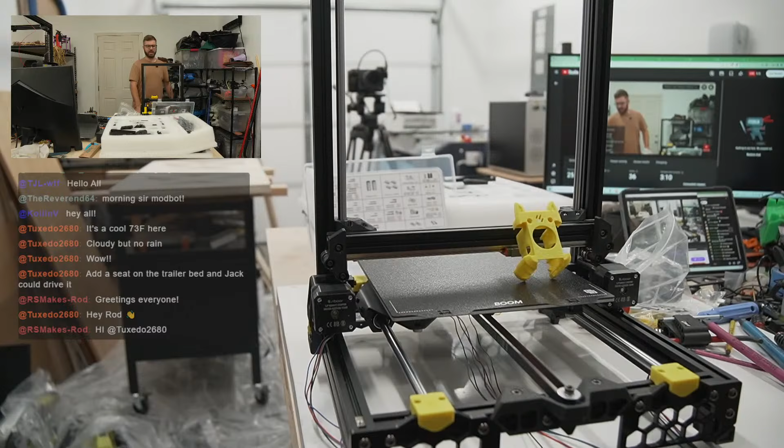Yeah, hey Rod. So today we are diving back into the, I didn't take an allergy pill last night, dang it, diving back into the Siboor boom. We have made a lot of good progress. Basically the base of it's all done. We got most of basically the tower itself is done.

This still needs to get belted. Only the y-axis is belted right now, which I'm not sure this tension feels, we'll see. Only the y-axis, hey Stuart, is belted. So we still need to belt this, and then today is largely toolhead stuff, so we're going to see how far we can get. I'd love to do the full toolhead today, but it really just depends on how cooperative everything is today.

71 Fahrenheit with storms rolling in soon. Where are you at, Kollin? It's freezing here, it's 38. Is it? Gosh, yeah, 38 Fahrenheit sounds cold.

Hey, Gergman. So let me pull up the assembly guide. This is where we are at, the X carriage. So we are going to install magnets, install some bolts, get out that rail.

And then we're doing belts, so let's get into it. Man, it is warm out here. It's also coming from the house with the AC, which makes the transition feel a little bit more aggressive for me today.

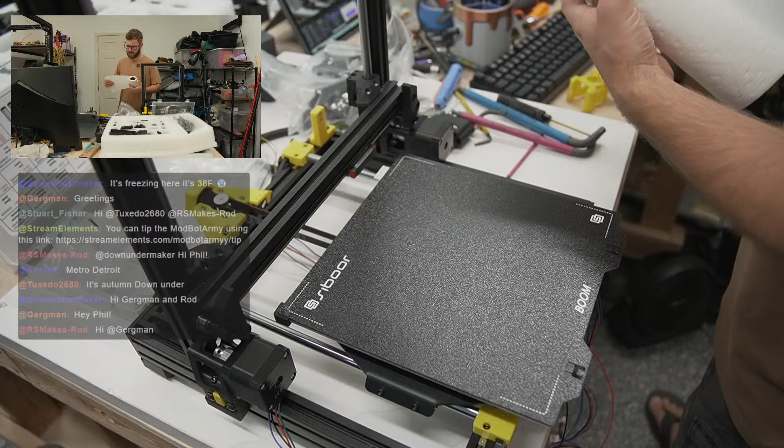So let's raise this up, and we'll probably just build the first part of this on the bed itself. I'll end up putting down a paper towel, we will place this across the bed, maybe double down because we are going to be using some grease, and I don't want to get grease all over the PEI. I almost wonder if I should take off the spring steel. We'll leave it, it's fine.

All right, so first things first, we need this piece right here. It looks like, right? Yep. So that piece is going there, and then we need some small pieces. Let's see, are they yellow? They're not, they must be in this bag.

How's everybody's week going? It's autumn. Yeah, you've got a very different climate going on down there right now.

Okay, so this looks like this is probably one of the pieces we need, and this is the other piece we need. Okay, so we need magnets. Magnets. Where? Magnets. Okay, got magnets.

Let me sit for a sec while I'm looking at this. What's stressful? What's stressful? No stress.

Okay, so this is saying round magnet hex hole. The magnet seats here hold much better than a round hole. The seats have been carefully designed and tested to maximize holding power.

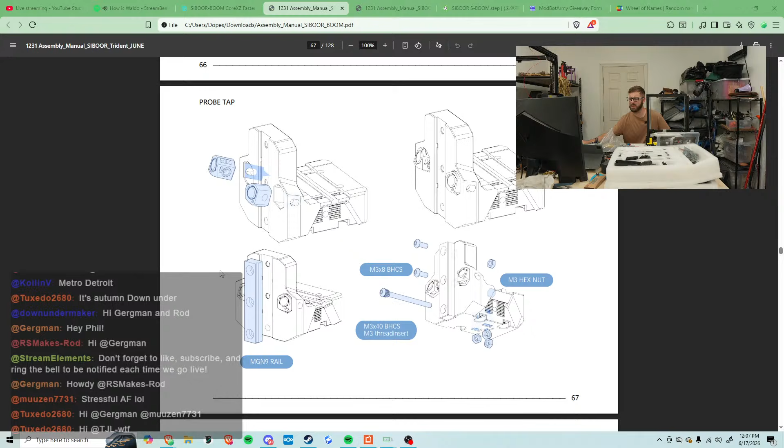Okay, does orientation matter for any of this stuff with the magnets? I assume yes, I would think that these guys need to attach to these guys. Let me zoom in a little bit too so you guys can maybe see a little bit better. I haven't done tap in, gosh, a long time. So is that correct, that basically the polarity needs to make it where these guys are attracted to these guys? Or no? Or maybe it doesn't matter.

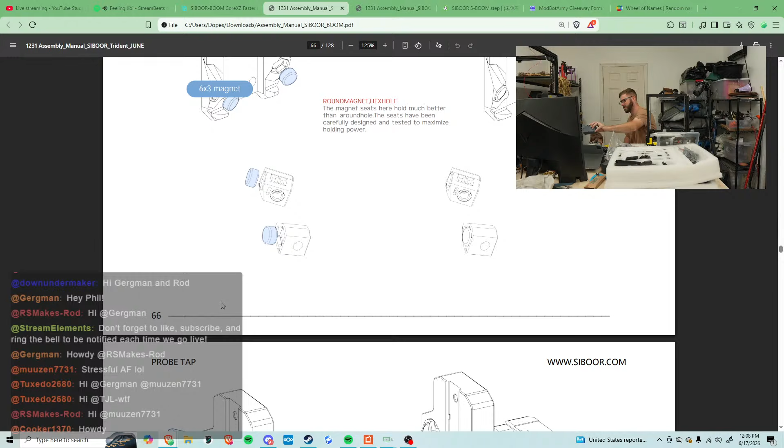Hey, you can't be in here right now, I'm streaming. You don't even have pants on, go put pants on, dude. You can't come up here without pants on. Steve is not in chat right now, buddy, Steve's not here right now. You can press one button, but you can't come up here, dude. We have a strict pants-on rule, okay, there's not a lot of rules in the garage, but pants on is one of them. All right, press the button, buddy. Okay. Yeah, that's the newer one. I wonder what's for... All right, okay, you gotta go either back in the backyard or you gotta go in the house, buddy. You can't be in here right now with no pants on, you understand? And you go back out in the garage, back outside so Mama can see you, she's probably gonna be worried about you otherwise. Come on. I gotta lock this one for now, okay? Okay, I love you, a crazy pantless kid running around.

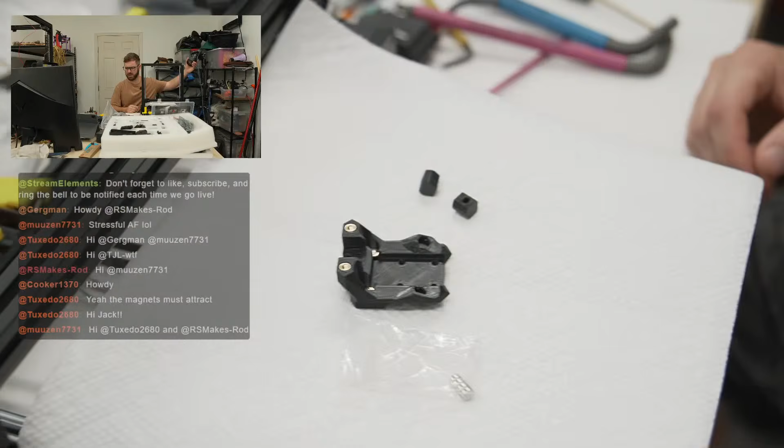All right, yeah, magnets must attract, that makes sense. So let's do this. Okay, we got that. I mean, I get it honestly, like if I wasn't streaming, having no pants on sounds great. It's pretty warm, like I said.

All right, so let's do these magnets in the same orientation if at all possible for the ones that are going into here. So let's split these apart. There's one, and there's two. Okay, so let's get our Knipex pliers out and adjust these. Let's see how thick these need to be. This is going to be a little bit tricky to even squeeze in here, I think.

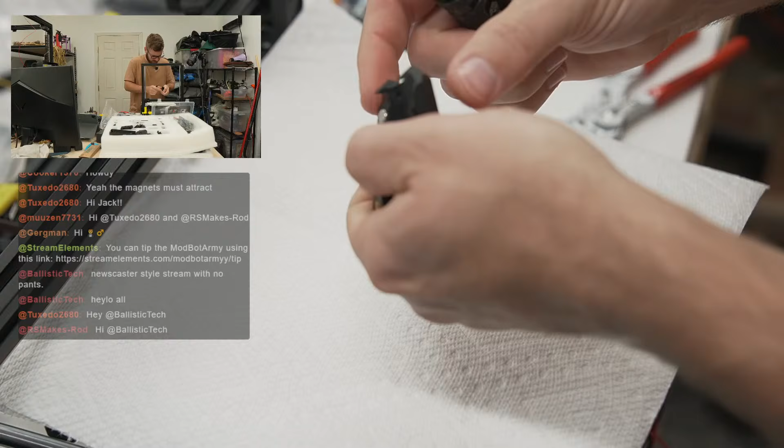Let's see, that might work. Oh, come on, let go of my magnet, please. Okay. Actually, I don't even need that, I'm just going to use a driver, a pretty large one, not an Allen key. And we will put this here and just try to push. That's as far in as that's going. Is that? Hopefully that's not an issue.

Okay, and then to match orientation, this guy should be going like this. Please don't fall out, there we go. Okay, so those seem good, hopefully those stick. I don't know, I guess time will tell.

Hey, Ballistic! Yeah, hopefully those stick, let's see if I grab these magnets, if these are gonna try to pull themselves out or not. Okay.

Yeah, they seem decently stuck. Okay, so next we're putting the magnets in these guys here. And the thing I want to determine is, so these are going... oh yeah, they're going into a completely different piece, aren't they? So these are going into this piece, like this. Okay, so for orientation, let's go ahead and adhere these like this, so we know they're in the right orientation. And then let's see if I can just press these guys in. Like that, there we go. Okay, so we should be good, hopefully.

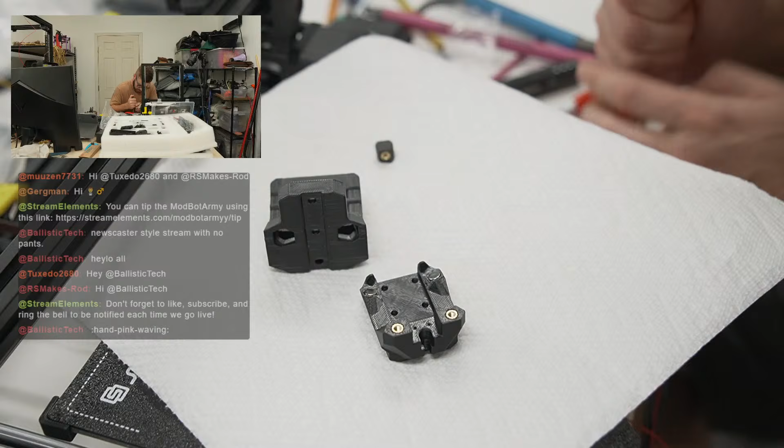Okay, that's as far in as that guy's going.

And wait, how was Murph? Wasn't Murph last weekend? Anybody here go? I totally forgot that. I'm like 99% sure last week was Murph, last weekend. Hey, Clown.

Okay, so we've got this guy like this. And then it looks like we are just going to be installing these magnets in. Is that correct? That orientation? Ooh, that doesn't look right. That feels wrong. I think I did that wrong.

Okay, let's see, I think it needs to go... yeah, so the threaded insert needs to be facing inside, so this must be the right side. That feels better, I think. Mine aren't sticking out nearly as far as theirs appear to be though, which is interesting, but this seems correct. But maybe it's not. Oh man, what am I doing?

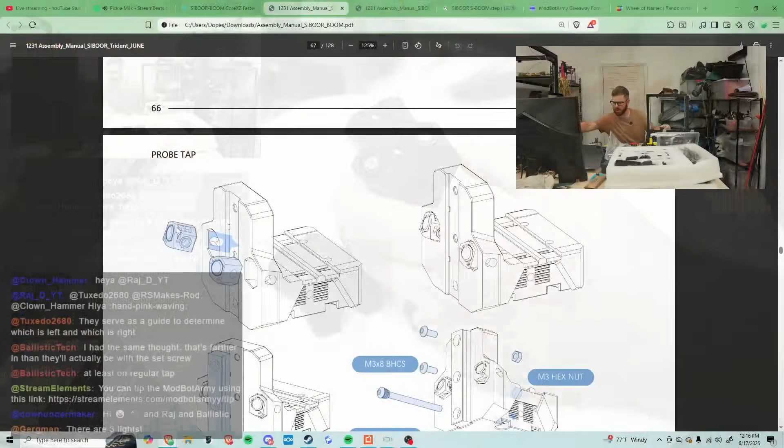Yeah, this has to be right. The things I'm looking at are 2 dots there, 1 dot there, and then there's these little tiny pieces on the corners here, and mine match up with those, so this has to be correct.

Okay, so next we need what? We need... So it looks like we're not doing anything with screwing those parts in at this point. We are basically just taking our MGN9 rail. Okay.

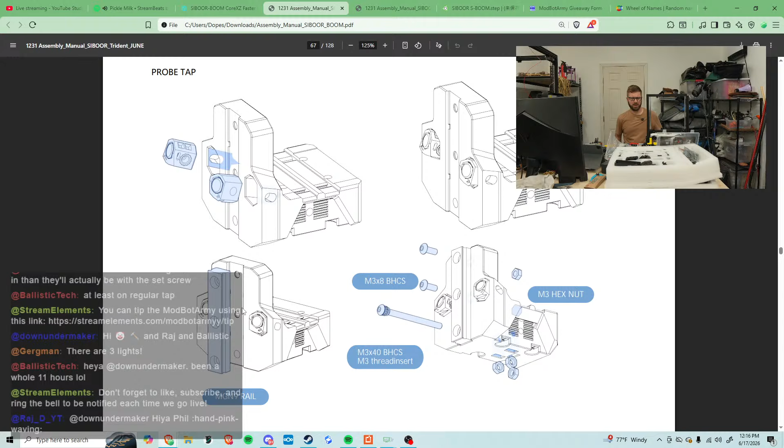I think before I do that, I'm gonna shove grease inside of the block and then I'll take it off. Actually, if we... we'll see, we'll see. Where is that rail? Wait, is that rail inside here maybe? No. Where is that rail?

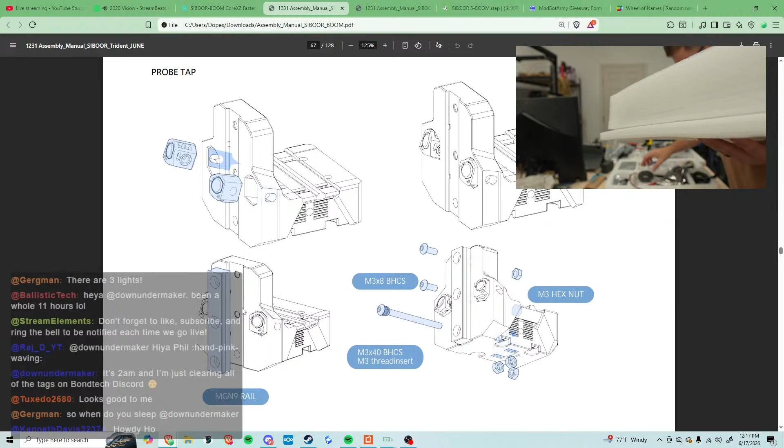This is a power supply. Uh-oh, I'm not seeing... is this it? I found it. Okay. Hey, Kenneth.

Okay, so this guy needs to get cut open. Some flush cutters.

We did make some progress finally on the shed. I did a bunch of string lines in a couple places where we were considering having it, and we decided on a 10 foot by 16 foot shed. We have configured it, and so the... let me think for a sec here.

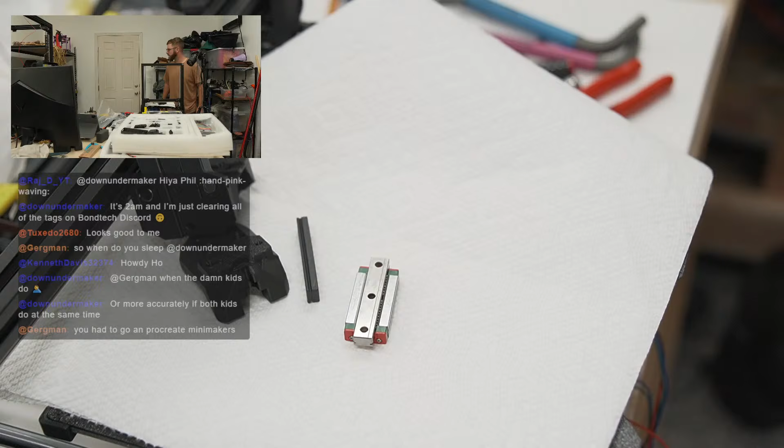I'm gonna grab for this one. I think I am just gonna apply grease directly to the balls and hope for the best. But I do want some sort of a container. There's got to be an empty container around here somewhere. Give me 1 sec, let me do a quick walk around and see if I find something I can use just to prevent the balls from... Man, all my containers. Oh, you know what, we'll just use this lid. This lid's probably gonna be sufficient.

So yeah, we got that done. I did get a quote for concrete, and the price was fair, I think.

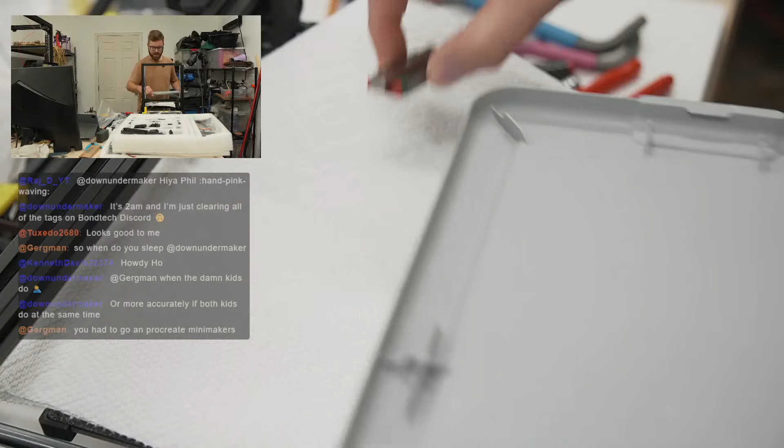The biggest thing I don't love, which Aaron said also completely turned her off, was when we received the quote from him, the amount of spelling errors in it were mind-blowing. Instead of it saying concrete slab, it said concrete slap with a P at the end. And then instead of mesh wire, it said something else entirely. I get that it maybe means nothing, but on such a small quote, how can you have such little attention to detail?

So we'll see. I submitted everything because we're HOA, I had to submit everything to them. They just emailed me back telling me they submitted it to the engineering committee, or whatever silly name they call it.

Okay, so that does slide on nicely. So let's try to grease these balls. We'll see what happens.

At least you know he didn't use AI. Yeah, dude, I couldn't believe it. Like the big line item, right?

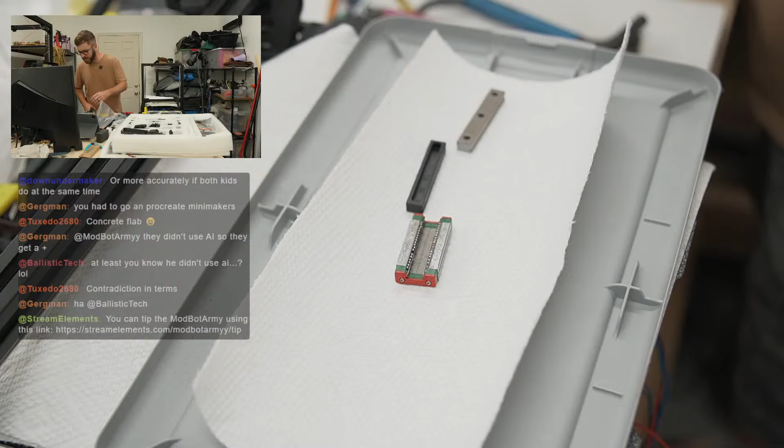It just says concrete slap. And I'm like, oh, dude. I told him when he came out here that I had to get approval from HOA and then had to pull a permit for the electrical, so I said take your time. And I'm like, man, I told you to take your time. Take your time means just check that the one line item doesn't have spelling errors all over it. Okay, so contradiction, yeah. He's like, no, you paid me for a concrete slab.

All right, so I'm going to attempt to just— oh man, there's like some, no, hold on. I got fuzzies on this. I don't want fuzzies being shoved into the balls. Okay.

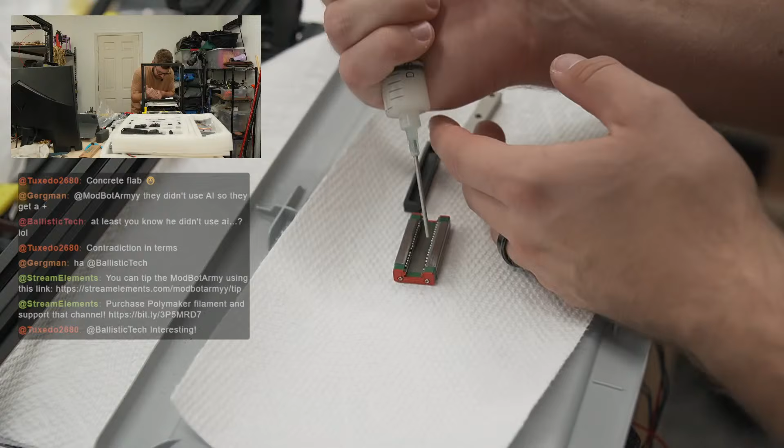Wow, the temperature and the fact that this is getting lower is really helping the grease come out a lot easier.

Okay, I'm pretty sure I usually use tweezers, or like small tweezers like this. Let's see. Let's see if I can do this and not have balls pop out everywhere and regret doing this.

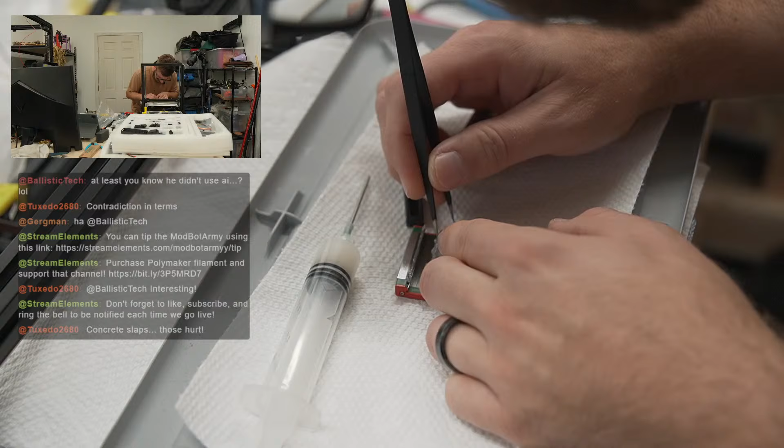Okay, we already had a ball pop. Yeah, I don't know if I'm gonna do this, guys. Balls are popping out like crazy, dude. I'm not doing this. I'm gonna put the cover back on in a sec here.

Let me get these balls back in. Let me clear out this grease. Should have just gone with my gut. Should have just gone with my gut, but I didn't. That's okay.

Okay, so I am going to attempt to put this guy back on. Balls are wanting to pop out. You know what? Okay, here's what we're gonna do. We're gonna take this guy back out like that. Get all the balls back in place one more time.

Okay, let's try the plastic one. Okay, so we still lost a ball. So let me get that back in on this side. Nope, don't fly away, please don't fly away.

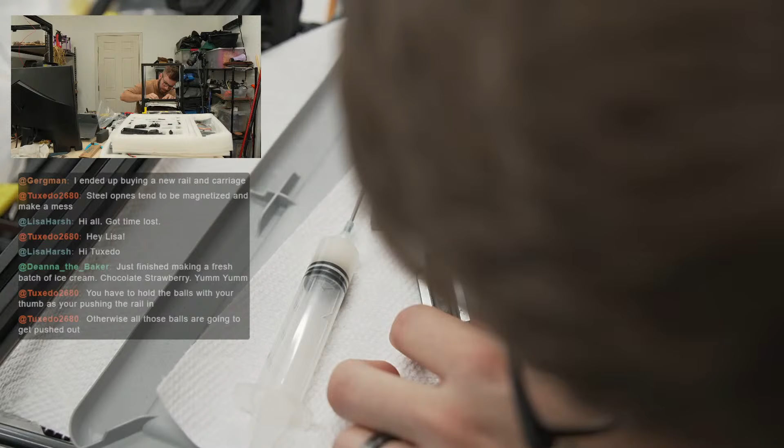There we go. Okay, all of our balls are in place. So I'm going to slide the metal rail back on. I'm going to shove a bunch of grease through it, swap it back to the plastic one.

Okay, so yeah, I'm just gonna brute force grease into this guy. Oh, geez. Lost all his marbles yet?

No, but I tried in this one. I was just gonna apply grease directly to the balls, but they were popping off, man. I'm not gonna do that. I'm going to clean this nozzle, shove a bunch of grease into it, and call it good enough. Because having slightly less grease than necessary, in my opinion, is better than having missing balls for this.

So, all right, grease is in. Now we're going to just slide this guy off. Like so. Okay, should be good. I'm gonna clean all this excess grease up though.

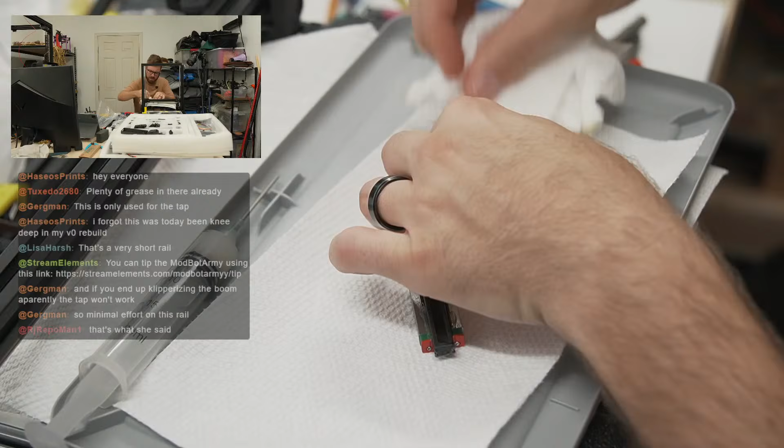All right, I think that's probably good enough. Maybe one last little dab. This guy's got quite a bit of grease in it still. That's fine. And then there's a little bit of excess on this guy, so let's just wipe. All right, I've got greased up fingers. Okay, I think we'll call that fine. We throw that in the trash and put this guy back over here.

Okie dokie, so we are going to take this piece here and we are going to attach it with... why are there... it's almost like standoffs built into it. I assume that's intentional. Okay, so let's just get some M3 8 button heads.

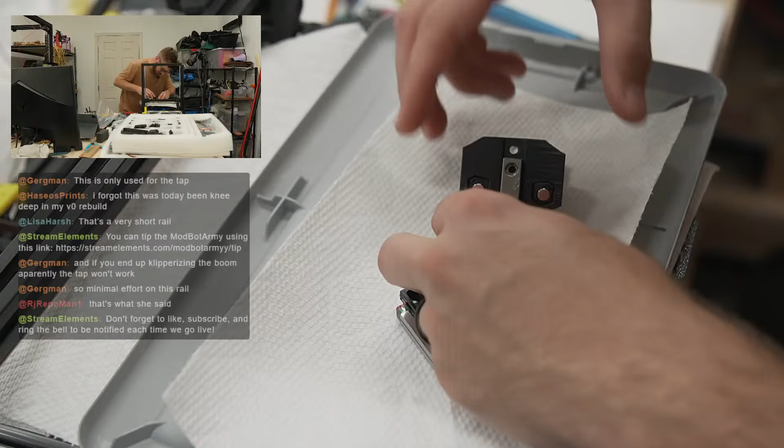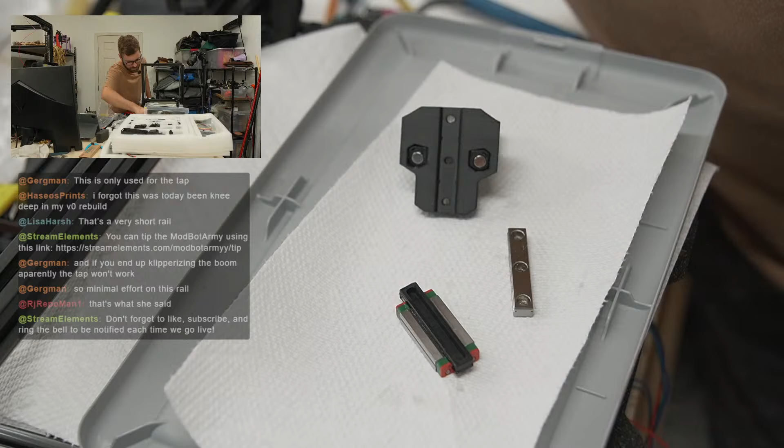Are these supposed to have... oh no, these have nuts that go into them. Okay, so we need M3 hex nuts. I didn't see that. M3 hex nuts. Those are way too large. These are M3. And then we need M3 8.

M3 8, there we are. 3, 1, 2, 3, 4. Those look a little too big. They must be correct. Okay, these are M3 8s.

All right, you need a standoff. Got it. Okay, so basically it's going to hit a physical stop in the toolhead. So, yeah, let's start with the 2. If orientation is wrong on this, so orientation, it should be like this. And then we're gonna drop 2 nuts into the pockets.

Okay, so 1. Nope. Okay. Oops. I don't know why they had us put these magnets in right now.

Like they just want to fall out since we haven't secured them in yet, but it's what the instructions show. So we got 2 of these, and I don't think I have a 2. I don't think I have the right driver down here, so we're gonna use an Allen key for this. This is just going in like this. Okay, I'm gonna zoom out a little bit. There we go.

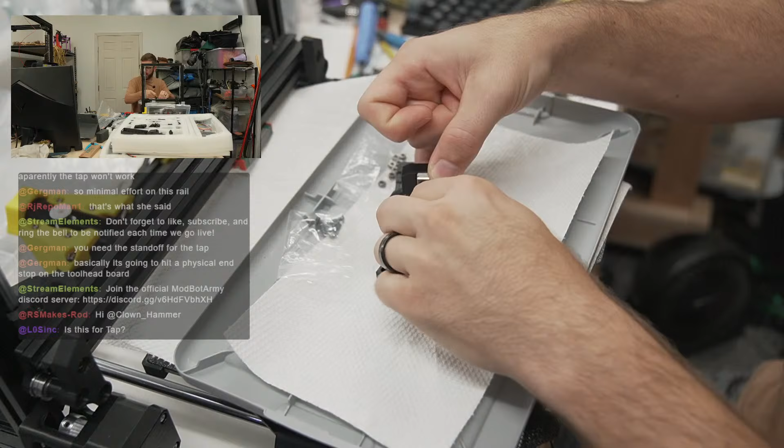Yeah, this is for tap, which is interesting because I was always told that the Enderwire, Switchwire type setups weren't stiff enough for tap, but that's what they're using. So we are going to roll with it and see how it all works out.

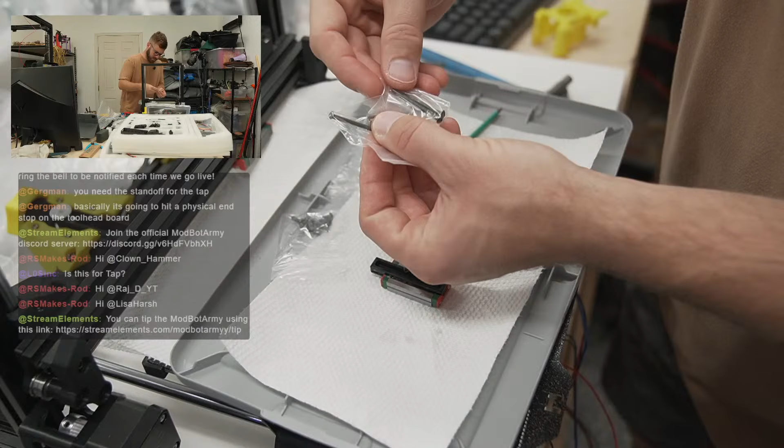Okay, those probably need to be tightened a little bit more, but they're at least in for now. And then the bottom one is an M3 by 40. That's going to be inside here, which is going to be the longest one out of the bunch. So that is this single piece.

And then we need a heat insert. Okay. Looks like the heat insert is going to be a standoff. I do kind of remember this. So the heat insert just gets threaded on, looks like this direction.

A lot of spinning here. Okay, so this guy's on, like the heat insert's on, and then it looks like we need a lot more M3 nuts coming in from the bottom. So for this one...

Okay, so I think for this one, it's going to be this far one right there. So let's start with that. Come on. All right, let's just drop this in like that. Is it all the way? Doesn't look like it's all the way, but kind of doesn't seem like it wants to go in further. We'll try it.

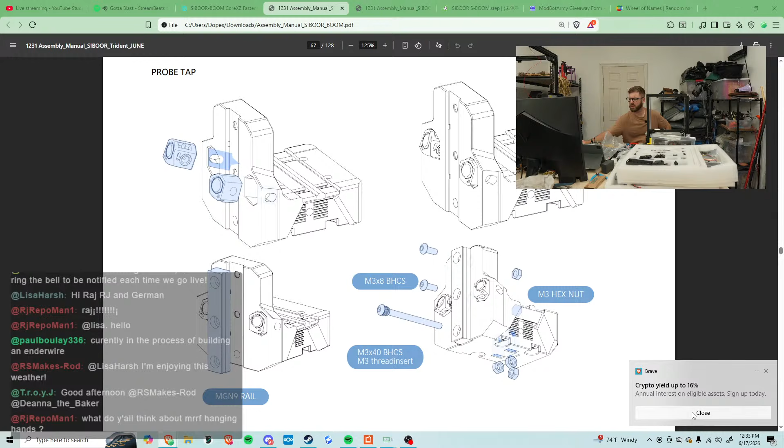Okay, that's plenty tight. Okay, so we got those. It looks like there's 2 more nuts that need to go in on the sides here, but...

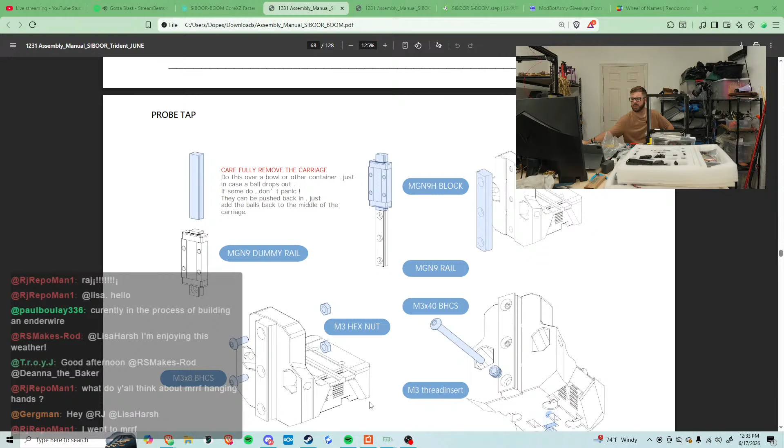Showing the same thing twice. What is going on here? Probe tap, probe tap. Didn't we just do this? Is this just like a different... That's weird, they kind of have the same instructions twice, but this one is just sort of a placeholder page. This one actually gives you detail.

Okay, so we need M3 12s then. We're finally gonna attach those magnets. We should have done that, in my opinion, prior to doing all the other stuff, but instructions didn't state that, so that's all right.

Okay. I went to MRRF, how was it?

What do you think about MRRF hanging hands? I don't know what in the world that is. This is the first time I've ever heard it. Might be the first time I've ever heard anyone use the phrase hanging hands. I don't even know what that is.

All right, so now we're going to install these, but probably not fully tighten them because they're slotted. We'll install them like that but leave it loose enough where this can still slide for now. And then this guy needs to go back into his home, and that is going to be like this.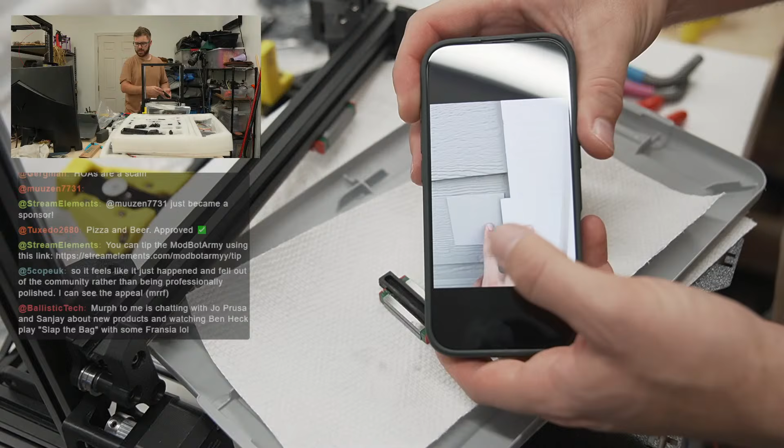So yeah, so far there's a few neighbors that just do stuff without asking the HOA. But in my mind, I don't want to risk a fee, especially since a shed's going to cost a substantial amount of money. So I wanted to make sure I did everything above board up front. They've been really solid about that so far.

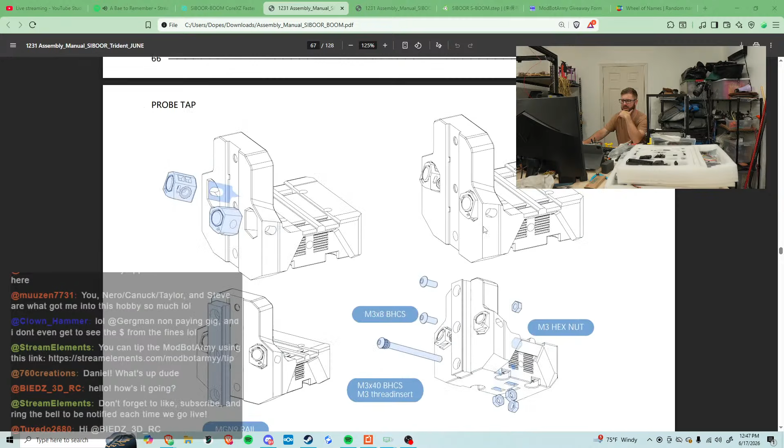There's two questions I have right now. The first is, it shows that we need to add nuts, but we haven't added them yet. Those look like they're probably for the belt clamp. I'm happy to add them, but my concern is if I add them now without a screw, they'll just fall out. My second concern is if I slide this block on here, it'll stop it from falling off in that direction, but what's going to stop it from falling off the top right now? That's my concern.

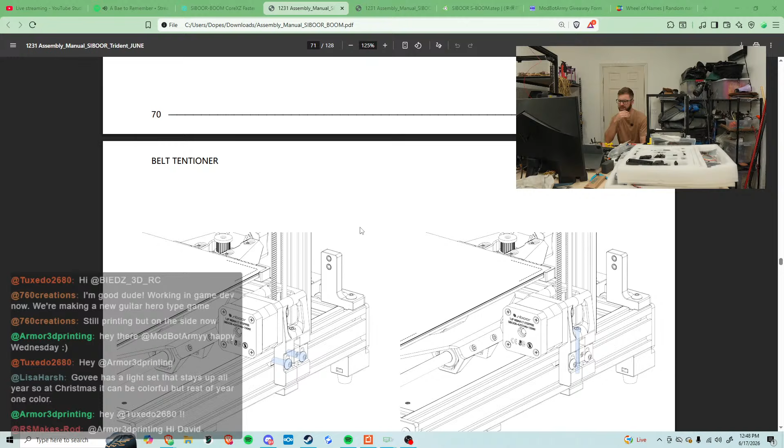Now, we're making a Guitar Hero type of game. Still printing, but on the side now. Dude, that's awesome, is it sort of like making a Guitar Hero type game? Is it an indie dev type thing? And is it something where you guys are hoping to release it on a platform like Steam, or is it going to be a standalone thing? That's awesome, dude.

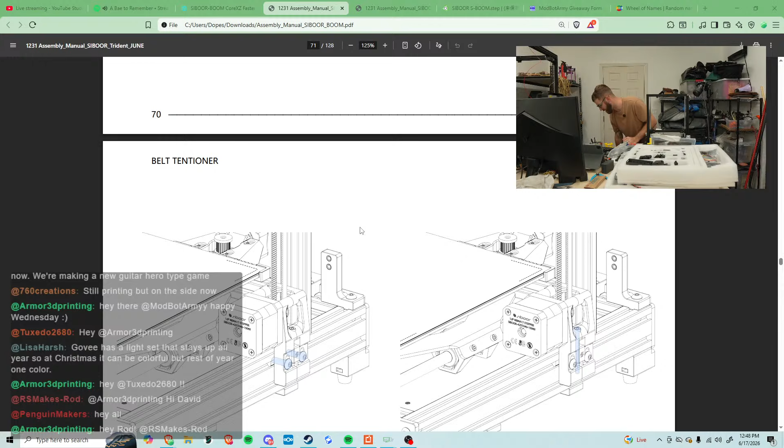Govee has a light set that stays up all year, so at Christmas, those are totally fine, Lisa. I'm talking about the big danglers, you know, the big Christmas light teardrop things that are all colored hanging from the rafter. Yeah, we have a few neighbors that have those Govee things as well, and those are totally fine. I mean, they're hidden unless they're on.

All right, let's try to do this. So we're going to install the nuts in the bottom here. I think they're going to fall out, based off the other ones. The pockets don't seem very tight, which is a concern. Let me put these nuts back in here. Yeah, those just slide right in, so the second I turn this over, they fall right out. So what's the point of installing these right now? It doesn't make any sense.

Okay, but we do need to get this rail on here, so let's try this, see if I can do this without damaging anything. Okay, why is this rail... okay, there we go, we didn't lose any balls. Wow, this thing barely moves at all. There's a very small amount of movement, which I get is all it needs. Okay, we got that guy on there.

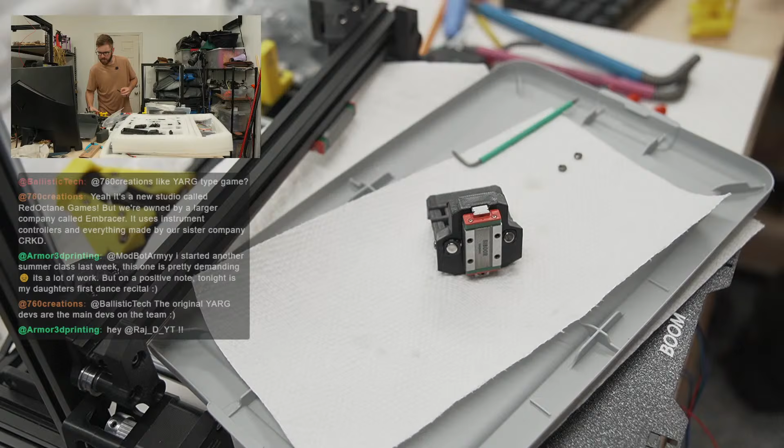It's a new studio called Red Octane Games, owned by a larger company called Embracer. It uses instrument controllers and everything made by our sister company, CRKD. Nice, dude. Are you fully remote for that, or did you have to move somewhere to take on that job? Congratulations man, I'm sure considering how passionate you've been about that whole space, it's got to be a bit of a dream come true.

I started another summer class. This one is pretty demanding, it's a lot of work, but on the positive note, tonight is my daughter's first dance recital. That's exciting man, I hope it goes well. That's awesome.

I'm remote, but I moved from New York City to Florida at the beginning of the year. Nice, how's that transition been? My brother's actually in Florida now, he moved from California to Florida.

Okay, so now we need M36 button heads. We're going to be sliding on this guy, and the orientation for this looks like this. Like this. Okay, let me get the screws out. M36, M36.

Where, oh where? Some of the screws they put in here, the layout of the grid doesn't make a ton of sense to my brain, but that's fine, it's not that bad. Okay, so M36s look like they're in here. I found them.

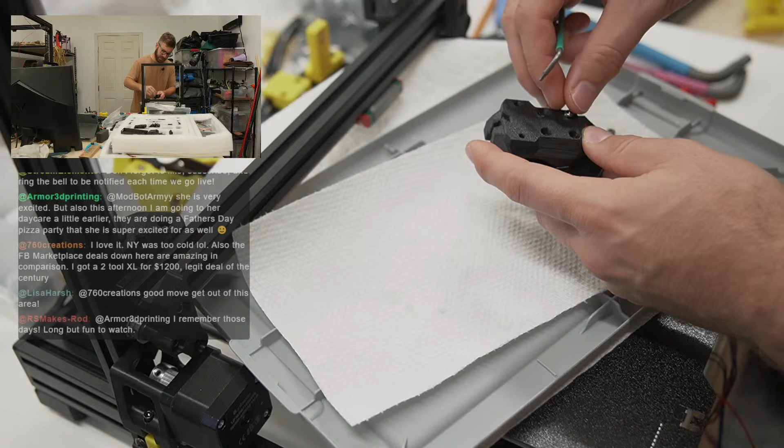I love it. New York City was too cold. Also, the Facebook Marketplace deals down here are amazing in comparison. I got a 2-tool XL. Holy cow, that is awesome, man. Yeah, I'm on the opposite end of that. Going from California to Idaho, the amount of crazy deals, Facebook Marketplace wasn't what I used. It was mostly OfferUp, or there were two of them. It was OfferUp and I can't think of the name of the other one. But yeah, then I came out here and was like, dude, OfferUp is kind of not a thing. Everyone out here uses Facebook Marketplace, and it's decent, but compared to the population of California, it's certainly less.

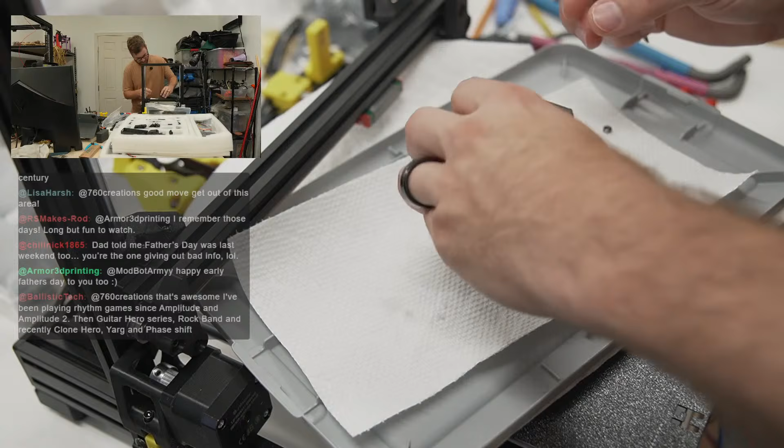Why are we not screwing in? Let me see if I can get the other one in. Is it because it's not fully on the rail? Oh, there we go.

Thanks, man. I appreciate it. I don't think we're doing much for Father's Day. We've got a bunch of stuff coming up though.

I think we're going to a rodeo on Saturday, which I'm excited about. Aaron and I haven't been to a rodeo since I was in middle school or something like that. In Idaho, there's a bunch of them. We wanted to go, but the kids have been so young. Landon's 10 months, so I still need to look into earmuffs or something for him, but Jack's gonna love it. Then the following Saturday, there's a hot air balloon thing going on, so we're gonna go watch those. And then I think the following weekend there's just a lot of stuff going on. So we're not doing anything specific for Father's Day, we're gonna be doing some family stuff, so that'll kind of be the Father's Day stuff.

Dad told me Father's Day was last weekend too. You're the one giving out bad info. Oh no, speaking of my brother, we got some Hi chillnick in chat, that's my brother. What's up, dude? That's so funny. Yeah, I'm the one that told Dad it was last weekend, so that's the reason why he told you it was last weekend. Yeah, my calendar is just off, I thought for sure it was last weekend. So funny.

There's a Mark IV near me right now for $350. Tempted, but I'd have to upgrade to a 4S, and I just got the A2L. I need to make more room in my garage. Yeah, that's super cool though, man. How long have you been in Florida? I can't remember when you said you moved. And also, where in Florida are you?

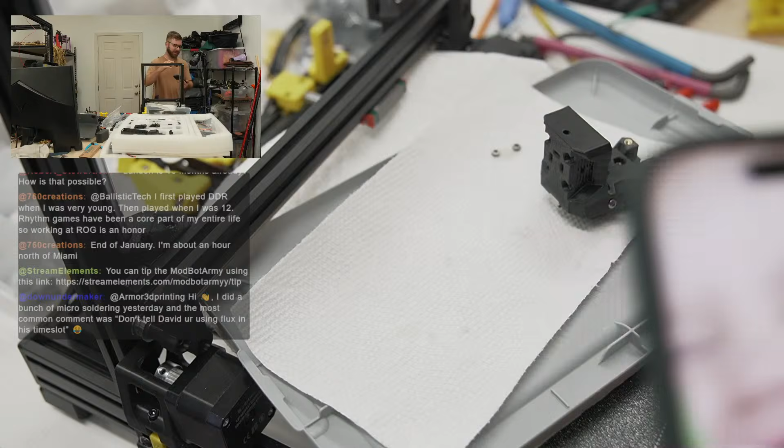Nice, nice, nice. Landon is 10 months. Okay, I lied a little bit, we've been rounding, but technically he's 10 months at the end of this month, so he's not quite, he's 9 months and some change. Also, he got his first tooth. I gotta show you guys this. Jackson already had almost all of his teeth at this point, but Landon's been teething forever, but just got his tooth here. I gotta show you guys this. Hold on, it's freaking adorable, man. Look at this little thing. Let's see, look at that little tooth. I don't know if you guys can see it very well, but right there. So he finally popped through his first tooth. But he's a gummy dude, man, he's all gums still pretty much. And he's a lot more interested in food than Jackson was at this age. Every time we're eating, he's staring at us, and I'm like, dude, you gotta get some more chompers in before we can give you into this.

Someone on Facebook Marketplace was selling a Mark 3S for $150. Wow, and that means I still have a Micro Center near me. That's awesome, that's super freaking cool.

So what's the deal with this printer? I actually peeked at Siboor's website there. We can sell this printer. Yeah, it's basically just a super budget kind of Switchwire / Enderwire inspired machine.

Maurice with the 35 months. What's going on, brother? Yeah, he's got a sharp chomper.

Yeah, so it's basically like an Enderwire / Switchwire. I'd say it's probably closer to an Enderwire than a Switchwire. The main difference, there's a few main differences actually. Let me change camera view really quick here.

What's up buddy, Jackie's here. Okay, you want to say hi real quick? Jackson's here, you want to say hi? I was just showing them your brother's teeth, dude. Ready? Here's our Jack attack, can you say hi everybody? What's going on, what day is today? Today's gymnastics day? Yeah buddy. You want to say hi to Steve? Steve's not in chat right now. You know what, if Steve watches the rerun he might hear it. You can talk to them and say hi Steve. Hi Steve, yeah he said hi Steve. So where's Jack, show him your teeth. Show a big smile. Jack's got a lot of teeth, man. They said hey Jack with pants, it's nice to see you with pants on bud. Earlier you came out here, dude, you were just living the life, man. What are you doing that?

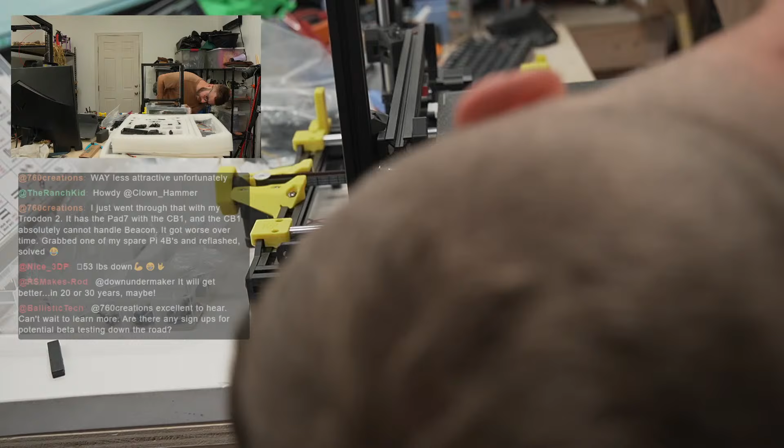How do I make sure that this is not... Okay, I don't think it's got any tension right now. Hopefully not. I'm gonna loosen the other side. I'm not gonna show you guys, but I'm gonna do the exact same thing I just did.

I also had to put wipers on my Prusa XL, but they still haven't done that. Why they still haven't done that, I don't understand. Also grease the couplers to make sure the tool attaches properly, Workhorse as single head, but multi. Yeah, I don't have any experience with the XL, man. I've seen both. I've seen some people have really good luck, and there's a couple people I've followed for a long time that seem to have just a lot of issues. So I don't know. I'm out.

Have a great stream, hopefully be able to stay longer on the next one. The printer looks great though. Hey, thanks man. We're a few weeks out from starting the Unimog build, so that'll be a ton of fun. Hopefully you can catch some of that. Have fun at the dance recital, and also enjoy the pizza, man, time with your daughter.

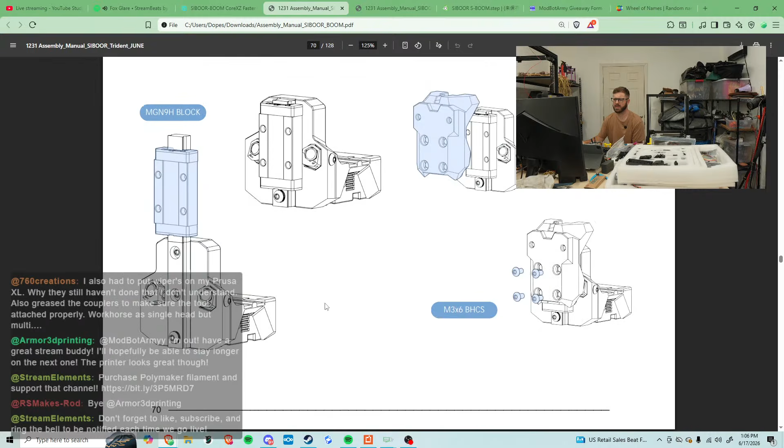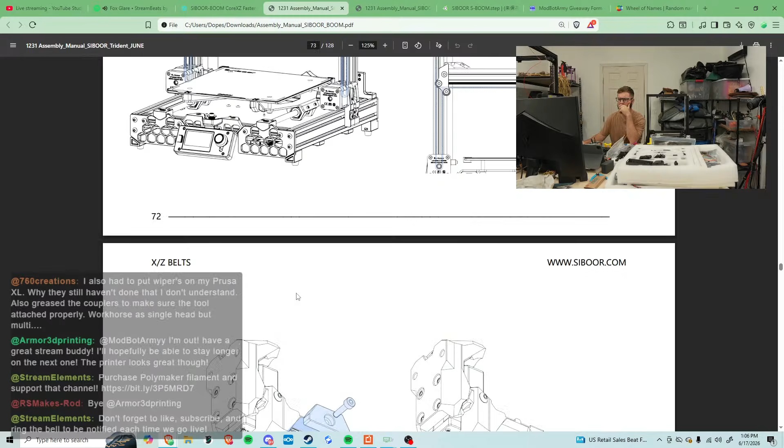Okay, belt path. Take your time and make sure your belt is routed as intended. Belts should never rub on plastic parts. Wait, did I miss something? Because on this, they already show that this is on. Ah!

Okay, so this is where we're going to use those nuts. So M312 socket heads. Well, it doesn't show attaching this. Am I crazy? It doesn't show. There's screws here, like that would go into the rail. But I didn't see anywhere it showed to attach it.

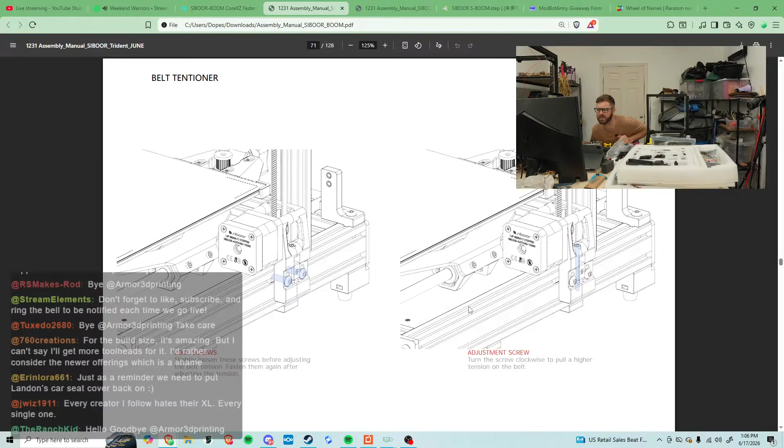Interesting. All right, give me one second. I'm gonna really quickly check something here. Okay, it looks like M320 button heads. I just looked at the CAD, so let's see—what did I just say? M320s?

Okay, so let's do a couple of things. Let's... okay, let's get these nuts in first on the bottom. Nice, thank you so much.

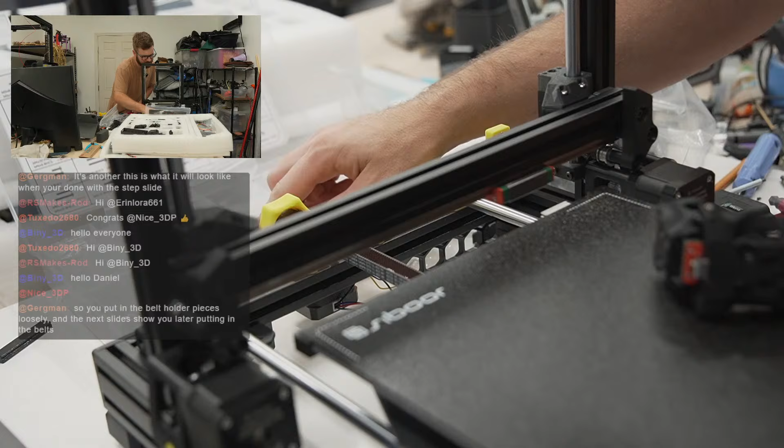M320 button heads. Let me pull those out right now so we have them and I don't have to keep remembering what they are. M320s, M320s, M310s, M320s. Okay, so these are M320s. And then what did we need for the other ones? They were socket heads, I know that. M312 socket heads are what we need. M312 socket heads, okay.

Okay, so now that is way out of focus. Let's get back in focus. So we're gonna drop these nuts in the bottom here, and then we need some plastic pieces—these guys.

Hey Biny, happy Wednesday. So you put the belt in the holder pieces loosely, then the slide shows you later putting in the belts. Yeah, that makes sense, that's what my game plan was. My game plan right now was just to get them in loosely. Because otherwise, one, I won't be able to get the belts in, but two, if I don't put the nuts in right now, I'll be fighting gravity because the nuts will just want to fall out. So it makes more sense to get these in now. Put this back here.

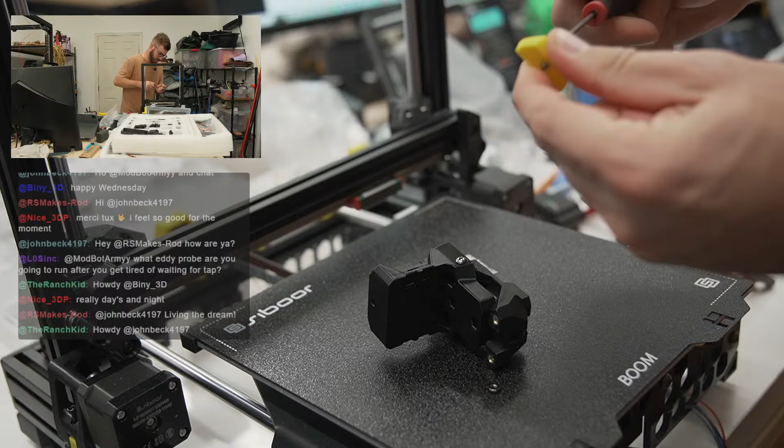Come on, buddy. Okay, that is really tight. Why are we so tight? I guess it's just the way it is. Actually, it shouldn't be. Oh crap, I dropped the nut. Hold on. Okay. Try that again. Okay. Wow, that doesn't seem great.

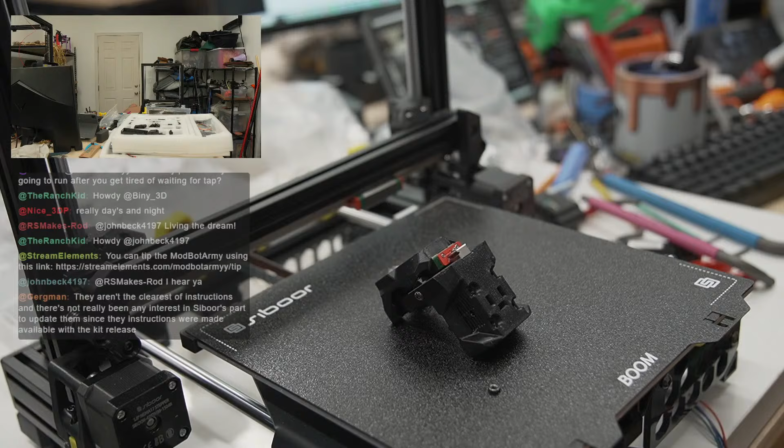So the issue I'm seeing is that I have like no gap for the belt to go in, even if I just thread this in a couple of turns. Let me see, which side do I have this in? Yeah, so if I just thread this in like... okay, I'm just gonna thread this in like one turn. I don't know that I'll be able to get the belt in there very easily. We'll see, I guess.

Hey John. What eddy probe are you going to run after you get tired of waiting for Tap? Well, if I'm doing an eddy probe, then I'm going to be switching to Klipper. So I don't know, for now I'm just going to run it as Marlin, even if it's just for the memes. But yeah, I don't know.

What am I doing? Something feels off here. Maybe it's just because it's not going in all the way. I'm gonna just tighten this and then back it off. I wish this hole... I almost think I should remount this hole so the yellow piece is able to slide easier. I think that's what I'm gonna do.

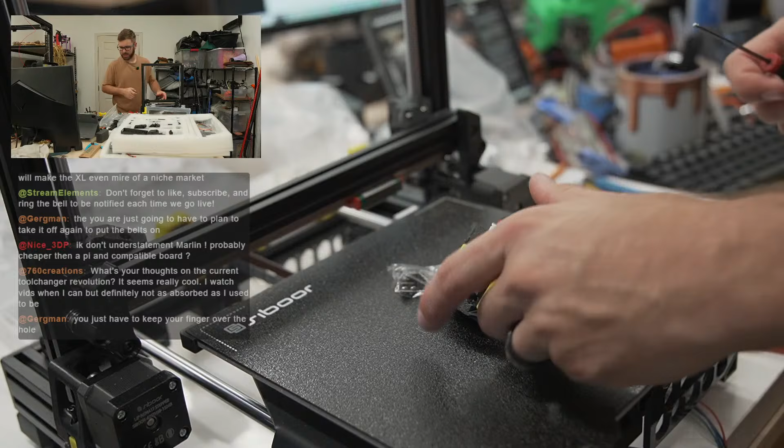Hold on, okay, that's a little bit better. Yeah, the biggest thing is that there's not a lot of designs that utilize multi-material, right? It's even cool for multicolor because you have less waste and it's way faster. And things like full spectrum printing are not really realistic without tool changing. So yeah, I'm here for it. I think it's rad. I'm just curious to see what sort of stuff people end up designing and what we're able to do now that we can combine different materials easier than before.

For anyone wondering, I am testing out the Creator 5 and the Creator 5 Pro, but I will be, as always with everything I do, tardy to the party as far as getting out a review, because I don't rush things. I'm wrapping up the review of the Bambu Lab H2D, and then after that, the next series of machines that will be getting more of my attention is the Creator 5 line.

But yeah, the main one I've been using is the Pro Forge that we built, which has been fine. I haven't been able to do a ton of stuff with it just because space upstairs in the studio is limited - I only have enough space to basically work on whatever the current thing is that I'm testing, so it's kind of off to the side. One second here, what were these? These were M3x20s, I think.

The U1, the Snapmaker U1, I've used quite a bit, and that's been surprisingly solid considering its price point, and it's their first go at a true tool changer.

I'm losing my mind, guys, I cannot find where this came from. Here we go.

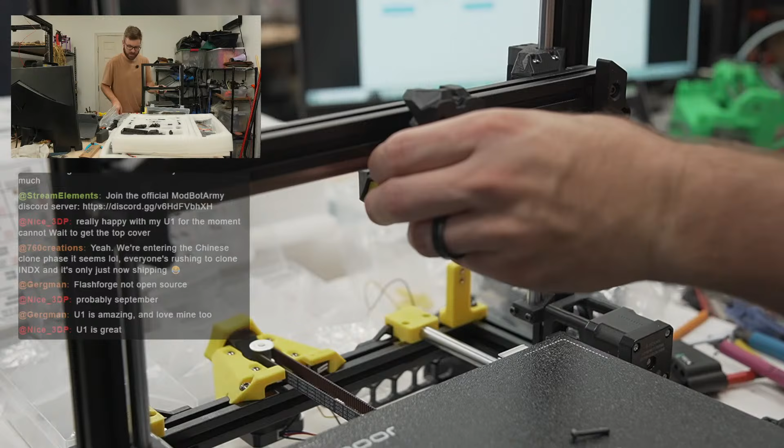Yeah, I'm hoping FlashForge comes around. I don't think FlashForge has ever been open source, which is probably one of the biggest issues. I mean, I don't necessarily care that they aren't open source. I think that they need to abide by whatever open source stuff they're using. But like I said, I use Bambu Lab printers, and they're certainly not open source, so I don't think that's a requirement. But if they are using open source stuff like firmware related things and whatnot, then that part of it should at least absolutely be open source. But yeah, if they don't open source the full machine, like give you CAD and all that, then I don't expect every manufacturer to do that.

This is awkward, I feel like I should tilt the machine.

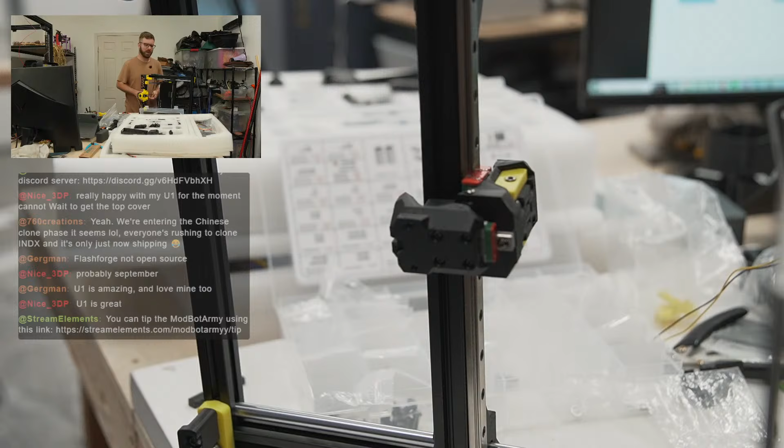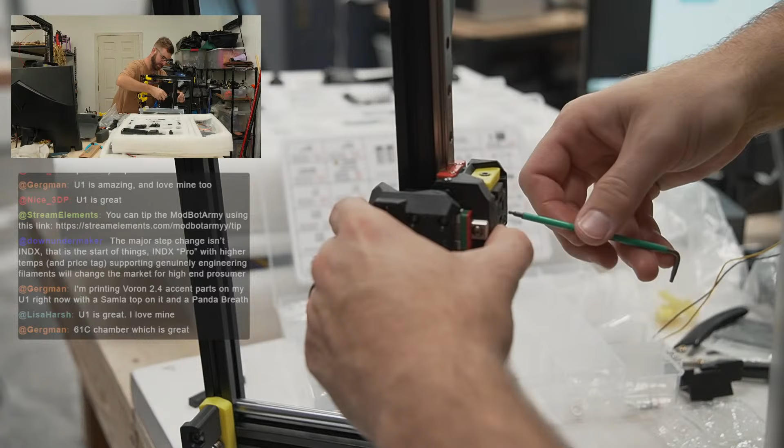Yeah, the U1 has really impressed me. Given that machine's price especially, I think that people would be impressed with it even if it was like 50% more. I think that the community would be smaller because anytime price goes up, it's harder to justify a purchase that's 50% more or double. So I think they are in a really good sweet spot for price and being able to build out a large community of people using them. So I hope they don't have to raise prices, or I'm glad that they went with the price that they did.

Come on, there we go. A little hard to get these in. Go.

It looks like there's a lot of conversation going on that I want to jump into, but let me get these screws on.

Dang it, there's a fly circling my head too. It's gonna drive me a little bit crazy.

Okay. Man, I'm starting to sweat out here.

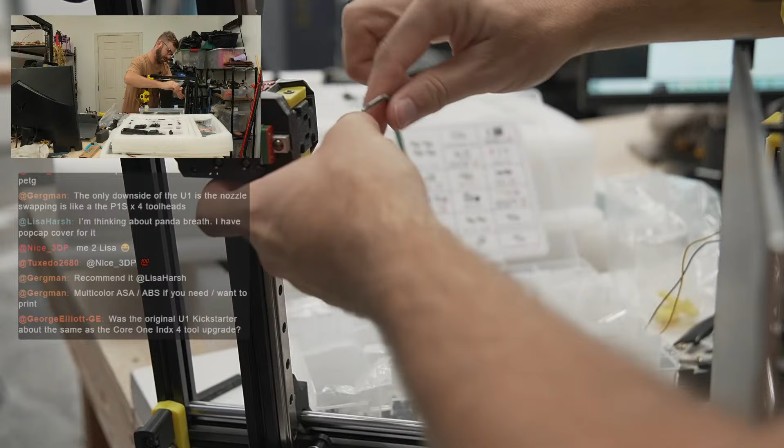Come on, yeah I wish I had a driver right now. Come on. This driver is driving me crazy, man. I need to order a set of drivers for the garage so I have all the sizes down here.

I'm just gonna use this side and call it good enough. Okay, that's good enough. Let's flip this up, right? Whoa, and we slammed. Thankfully, nothing seems to have shifted. Okay, zoom out. There we go.

All right, what did I miss?

Here we go. The major step change isn't INDX, that is the start of things. INDX Pro with higher temp and price tag supporting genuinely engineering filaments will change the market for high-end prosumer.

What are the limitations of INDX, actually? It's 300 Celsius. I'm printing Voron 2.4 accent parts on my U1 right now with a Samla on it, and a Panda Breath. Nice. I still have the Panda Breath installed on the P1S, but I also think I'd like to probably put it on the U1.

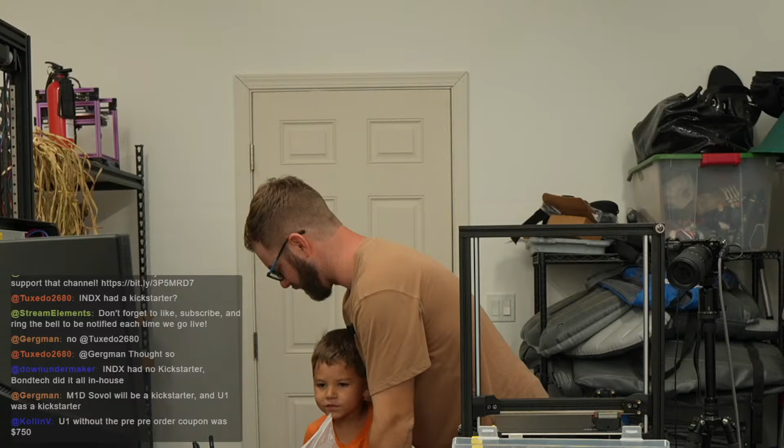Hey, I'm still working, puppy. Can't be in here right now. Well, if you're gonna be in here right now, you gotta sit over here so Daddy can build stuff, okay? You gotta sit right here, okay? You gotta just listen, okay?

So if you're looking to print functional parts that aren't as organic in geometry, and they're more hard surfaces, I think that'll work well most of the time. But for what I've done - multiple prints now using PETG for PLA supports - it has failed, just because of the extent of supports required and the angle of things. So it's definitely not just fire and forget.

You still have to consider what it's going to hold, because PETG does not want to stick to PLA. That's the bottom line, that's the benefit of it really, for support purposes. But it just comes down to what the model is.

INDX had no Kickstarter, Bondtech did it all in house. And the M1D Sovol will be a Kickstarter, but U1 was a Kickstarter. U1 without the pre-order coupon was $750. Okay, M1D isn't closed. Someone's knocking on the door.

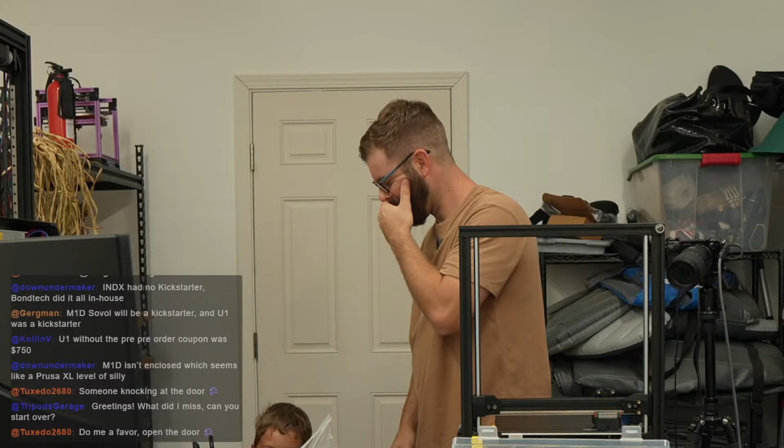Can you start over? Hey, John, how's it going? Hey, Don. Jackie, I gotta build, buddy. Okay, you can say hi, say it in my microphone. Hey, Don, Jack says hi, John.

All right, I'm gonna do belt stuff now.

You gotta go inside, Bubby. I'm not gonna be able to get work done out here with you for 30 minutes, my kiddo. Do you want me to walk you into the garage, or go back in the backyard and play? You can't ride your bike because Daddy can't watch you in the front yard right now, and Mommy's with your baby brother. So you got two options: Daddy will walk you into the house and you can chill until we go to gymnastics, or you can go back in the backyard and play for a little while longer. You gotta pick one of those two things.

Backyard? Okay. I only got like 30 more minutes, bud, and then we're gonna go to gymnastics, okay? That's a part for the printer. Careful with that, that's the front of the printer. Don't squeeze it. Look at it, it's got cat ears. See that? Meow. All right, come on, buddy.

I gotta go. When you want to go inside, you gotta go inside through the kitchen slider. Mommy will let you in, okay? All right, I love you. I'll see you shortly, okay?

All right, hey bud, kiddo pizza fun, no pineapple, smiley face emoji. Poor guy, he gives me the sad face. Hey bud, kiddo pizza fun, no pineapple. Thank you, John. We will definitely get Canadian bacon, extra pineapple. Wait, Canadian bacon's not what it is, it's Hawaiian, what am I saying? Thanks, man.

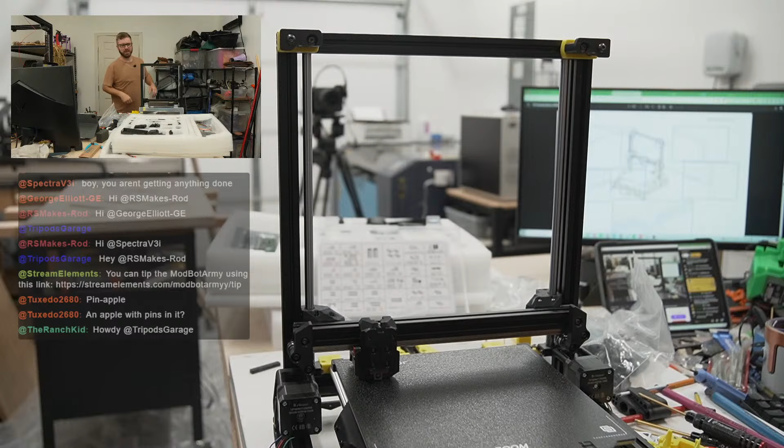He's back in the backyard. All right, let's get our belts. Where is our dang belt? Here it is. Nope.

Yeah, I thought today we'd get through the full tool head. Now I'm like, will we even touch the tool head? Probably not. Today has been the distraction of distraction days for me.

All right, so we've got our belt. I'm gonna try to cut this belt in half.

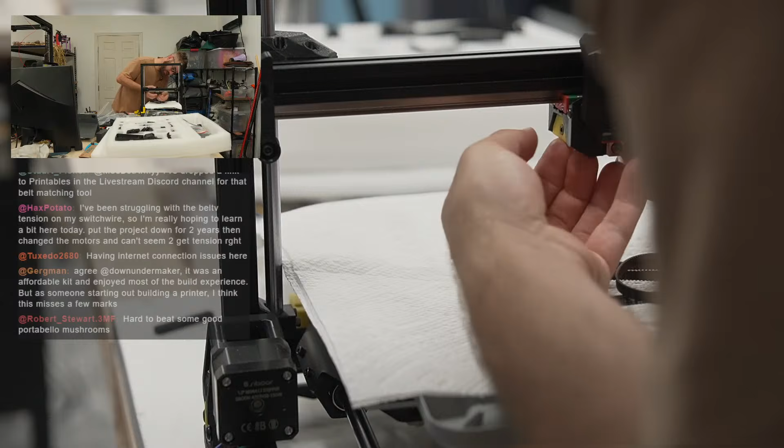Yeah, these yellow pieces I put on are gonna have to come off, but the issue is once they come off, I don't see any way these belts are passing through these pieces.

Tension it with the side pieces. Oh, got it, so you're saying you didn't worry about tensioning it at all, you just basically put it through.

Okay, so yeah, I'm gonna have to take this off. Probably gonna have to lay this thing on its side again now that I think about it, because the nut's gonna fall out. So let's try this, let's lay this like this, okay, slide this guy like that.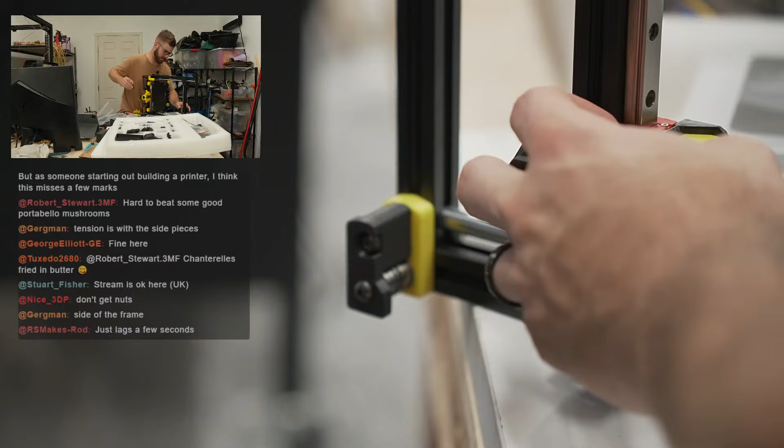So these need to come out, this is not gonna fly otherwise. So, shouldn't, I only had it in like a turn, so it must be sticking to the plastic. There we go. Okay, so...

Yeah, basically teeth.

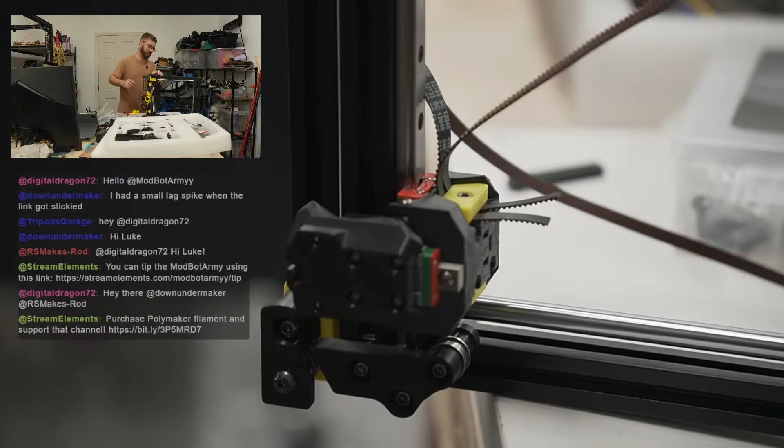I think I'll route them with it standing up, and then I'll have to lay it down on the other side again. Oh God. Oh, it slammed, I should have the keyback thing on. Well, it's probably fine, it's just a flat base, but that was an aggressive slam.

You'll end up fussing around a lot. Don't overthink this now. All right.

Okay, so let's start with the front. So the front one is rolling through here, and it looks like, let's see. Okay, so they're doing teeth on a smooth idler, which I don't love. I mean, I've done it before and it's worked okay, but generally it's not the best way to do things. Also, these are some very dirty belts.

Okay, so that is through there. And then I assume this is just going all the way over the top. Yeah, so over the top, over the top.

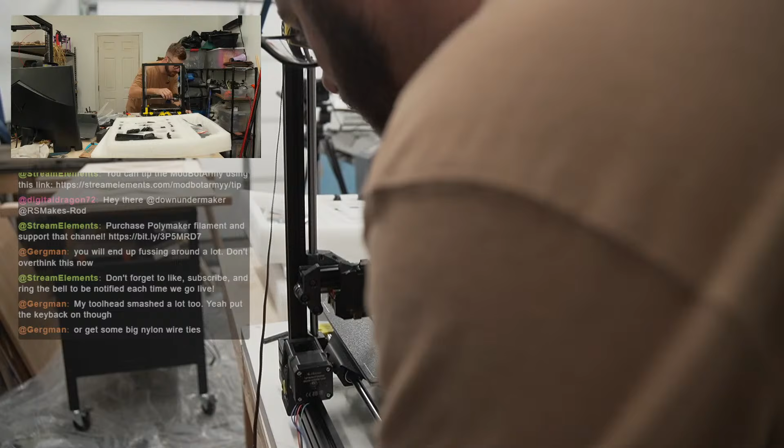Zoom out a little bit so you can kind of see what I'm doing. So the belt got routed around the idler, around the idler, around the idler, and then I believe this is going to be going around the motor now.

I might need some pliers or something to grab it. It might be easier to, let me see if I like something to elevate this a little bit. Yeah. Okay, so this is going around here. Do I have any pliers? I think I've got some needle nose pliers down here. There, do... Nope.

Maybe tweezers are better. It's kind of tight. Maybe I can just curl the belt.

My tool head's smashed around a lot too. Yeah, maybe I should zip tie the gantry for now. I think if I had zip ties, I could use them to help guide this. The belt just doesn't want to pop up on the other side, and I don't have a lot of space to work or reach right now.

I can ask, you guys want to see baby Landon, the biggest baby around? Our giant, a giant baby, the big Don.

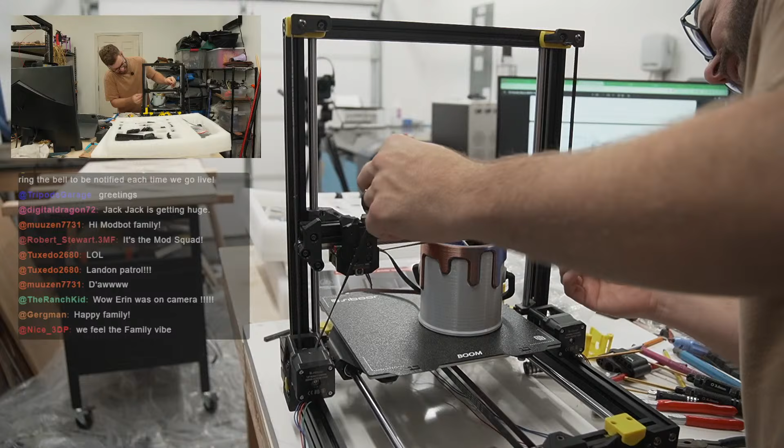Oh, you got twins, dude? I couldn't do that, I couldn't imagine, man. Oh man, like humor helps a lot, Erin and myself. I'd like to think we both have a pretty good sense of humor, and so there's been plenty of situations where it's like, do we cry? And you're like, no, like we'll just find the humor and laugh about this.

Okay, so I've got this all around. The only thing left is I think to tuck it over this final bearing like this.

Okay, but wait, why is that twisting? No, yeah, we're good. Okay, so I'm gonna leave that loose right now. We're gonna try to route the second belt, and then once I get it over to this side, we'll turn on that side, pull it through, and then I'll try to tension it a little bit. It's gonna be interesting, it's gonna be interesting.

Hangry, yeah. Well, what I heard was misses his nap time. Yeah, I do miss my nap time, I won't deny that. My brother got twins, man. Yeah, I couldn't imagine, dude. Like I think, at least Jackson now, there's a lot of things he's a lot more independent. And yeah, I couldn't imagine what it would be. Maybe like after, if we had twins with Landon, we could have figured it out. But on a first go, especially, I don't know, man. It would be challenging.

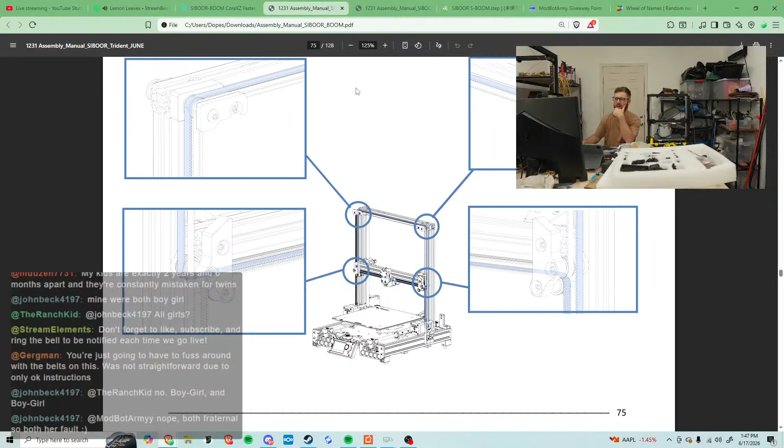You're just going to have to fuss around with the belts on this. It was not straightforward due to the only okay instructions. Got it, yeah, I think we're pretty okay at this point. I just want to verify on the second belt that I just ran right now. So I did go straight down, which is right, and I went around the belt, and then up top it has to go, and then it just drops over underneath that one and through. Yeah, I think we're fine.

So the next thing I'm gonna have to do is lay this thing on its side like we just did a second ago. Gosh, I wish I had more hands. Let's see, so move some of this stuff out of the way. Move this guy like this, turn you like this. All the belts are gonna want to go flying.

Okay. Something's wrong because the belts are like now different sizes, so I must have popped out of somewhere. No, we're fine, everything's fine.

Okay, so what I'm gonna do at this point is...

John with the 6 months. Just the coolest content. Oh dude, I don't know about all that, but I appreciate the kind words, man.

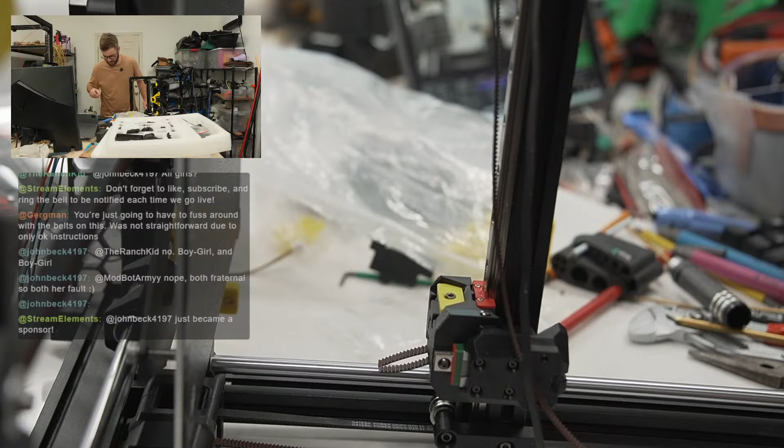Thank you so much. Okay, so yeah, what we're gonna do at this point is we're gonna completely take off this yellow cap, and then I am going to attempt to loosely route the belts through, and then kind of pull them tight, and then verify. We'll get them loosely through, then we'll verify that everything is still lined up correctly, then I'll pull them tight, and then we'll work on belt tensioning. So let's see, let's get this out of here because I've discovered that it seems like it's impossible to get the belt started with this in place.

So this is on the right side, like so. This is on the left side, like that. And then I think I can just start to tighten this down a little bit, like that. Okay, can I still pull these? Sure can. All right, so I'm gonna try to tension these like, that looks pretty dang even. Let's go ahead and tighten this more now.

My wife and my birthday are 6 months and 18 days apart, and my 2 sons are also 6 months apart. Wow, that's crazy, we're one big symmetrical family. Yeah, Erin's older than me by a few months, like 2.5 months, which I've always had fun with. I tell everyone this is my Cougar, especially for the 2 months or so when the number is actually different. I'm like, this is my Cougar.

Okay, so I'm gonna tighten this guy. Okay, so now both belt tensioning sides should be even. Or tight, I guess, maybe not even, that probably isn't the correct word.

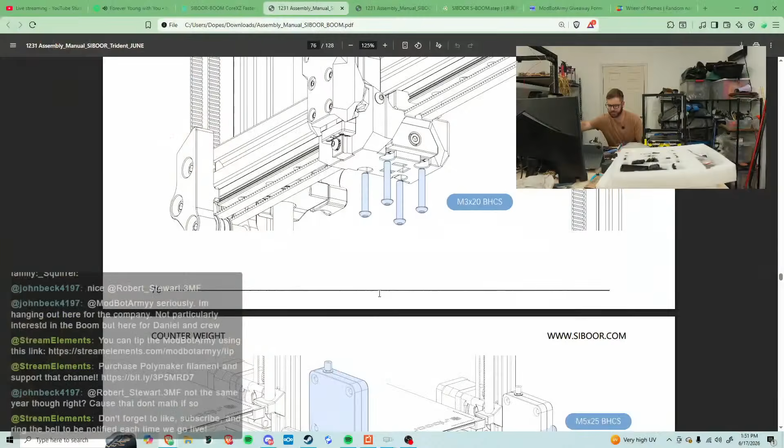All right, okay, so now it's having us do keyback, and then it's having us do tool head. The thing I'm curious about is if we go to, I want to download the Voron switchwire manual really quickly here and see if there's any additional information on tensioning, and if not, I'm just gonna wing it and hope for the best.

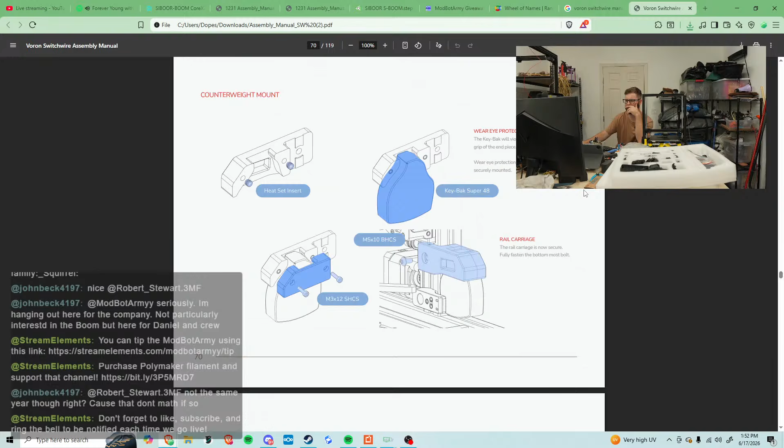But I'm curious to see if in this manual... motor mount installation, push the motor mount as far up as they slot into your parts. Okay, so yeah, this is where we would have just been. We did the X, X carriage we did. Obviously the X carriages are quite different. Okay, so belt path. Interesting, so they don't really cover tension here either.

Okay, so now I just want to think a little bit. So the way this works is, let's go sideways. Is that in focus? Not really. Okay, so pulling this down obviously adjusts tension. Pushing this block, how is this adjusting tension? Let's see, 1, 2, 3, 4, 5, 6, 7, 8, 9, 10, 11, 12, 13. That does tension. That does tension.

Okay, so that's our adjustment. Got it. So this is what we're adjusting tension with, and then once we're happy with this, we lock that in. That's what it's doing. That's what it seems like to me.

Hey, Zombie's here. How's it going, man? You survived, come back out? You survived MRRF, man. I'll let him out. Come here, monkey.

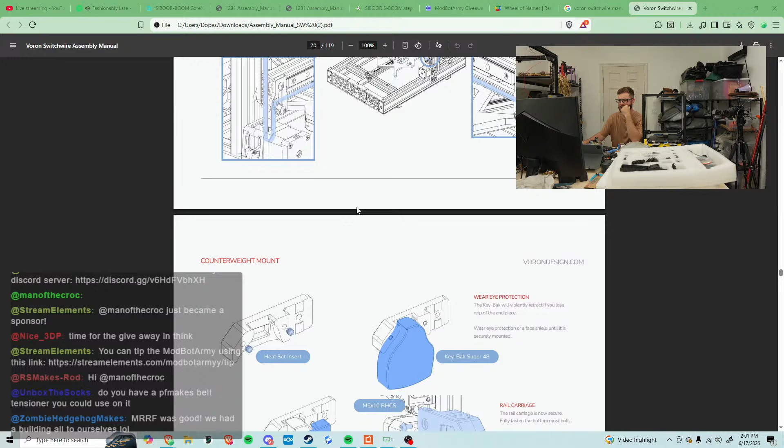MRRF was good, we had a building all to ourselves. Oh nice, wait, is it not? Did they change location? I haven't been in some years now. I think the last time I went was like 3 or 4 years ago. Did they change location? It used to be in like a singular barn building, if I remember correctly.

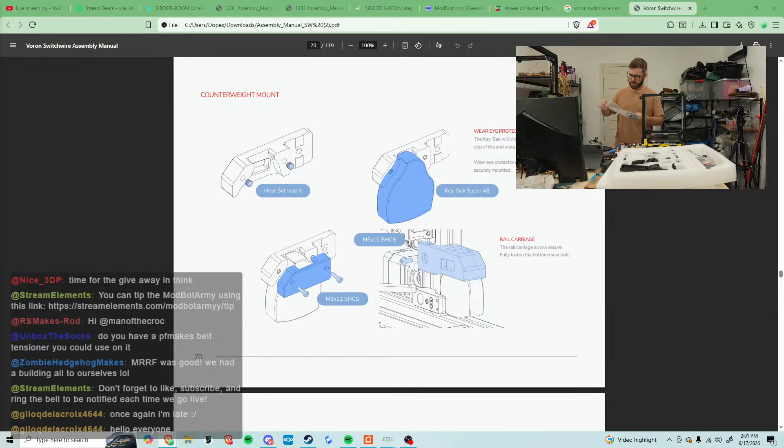I don't see the pieces for this. Oh wait, I'm looking at the Voron Switchwire. That should not have 2 manuals up, that is dangerous. Okay, here we go.

All right, so yeah, we don't have any. We don't have any, let me change the track.

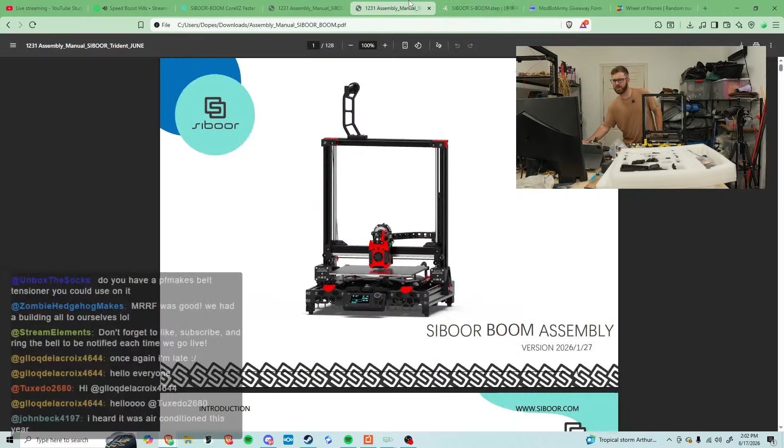I'm probably going to just install the Key-Bak before next week's stream, which is basically just 2 bolts, and then this little piece right here. That way next week we're just attacking the toolhead. I want to get the full toolhead done, man, we've got to do from A to Z on toolhead next week. If we do toolhead next week, I strongly believe we can have it powered on the following week. So 2 weeks from today, maybe pushing plastic.

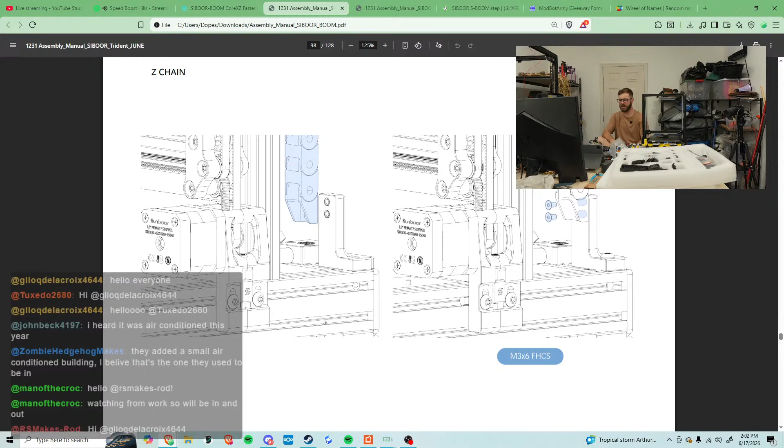Yeah, that's going to be the dream. They added a small air conditioner. Oh nice, I believe that's the one they used, the one that used to be. Got it, what was turnout like? You've gone to multiple of them, I'm sure. So compared to previous years, yeah, air conditioning sounds awesome. That sounds so nice, I remember it being really humid. It is a dragon burner. Yeah, it's a dragon burner with cat ears.

And then they have a custom boom board that they use for the toolhead as well.